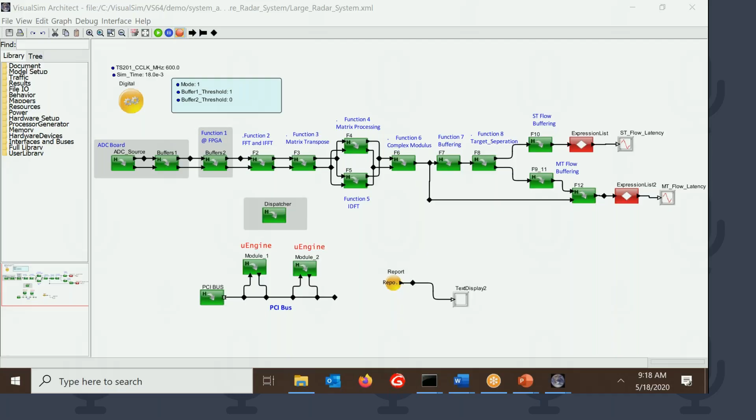Are you sharing the screen? Ooh, I forgot. Let me start again from scratch. Thanks. Okay, so can everybody see my screen? Yes, now I can. Okay. So let me get started.

So today what I'm going to talk about is the concept of a template. The idea of a template is that we provide a model that captures the definitions and the tasks and the operations of a particular application. Today in VisualSim, our focus has primarily been on discrete building blocks like processors, memories, traffic, stochastic processes, plotters, things like that. We want to move away from that to being able to provide a complete solution in the context of an application.

So, for example, I'm going to pick up an application right here which emulates a radar system. It actually does both the pulse Doppler and the scatter radar system. And it goes right from the time that you acquire the signals, the pulses that are coming in. It sends out an electromagnetic wave, gets the pulses back, captures it here, which is on the analog side, goes through a sequence of processing. Some of these are parallel processing, some of them are just sequential, and it ends up with either a static identifier or a movement identifier. So it has two different outputs.

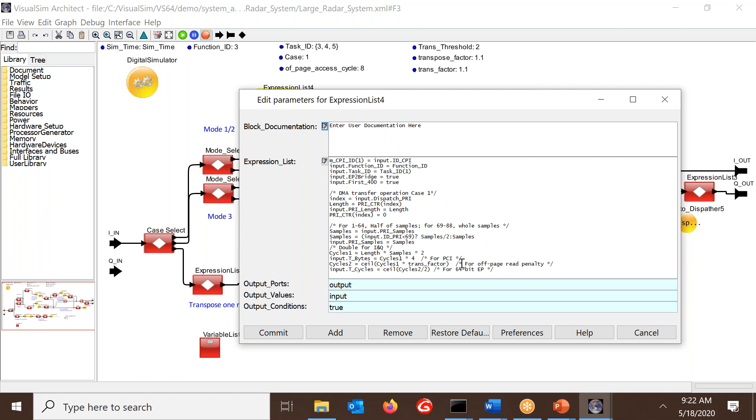And then it's going ahead and doing the calculation to come up with how many cycles it's going to take for the 64-bit processor. This is the main aspect that we need, because this is the one that's sent over to the hardware to say process for this amount of time with this amount of delay. The samples or the length or the bytes, in this particular case it converts all of them into bytes, is used for, for example, the movement of data on the PCI or on the Ethernet or things like that. So this is what a template needs to have.

It needs to capture all, see the data comes in, what are all the different modes, which are parameters over here, or they can be dynamic based on the data coming in. Does the computation of the length or the data sizes and the cycles, and then it sends it off to the dispatcher and gets it back. And of course, you could be doing it multiple times. In this case, it does it twice, which is the first 400 and then the next 400 bytes.

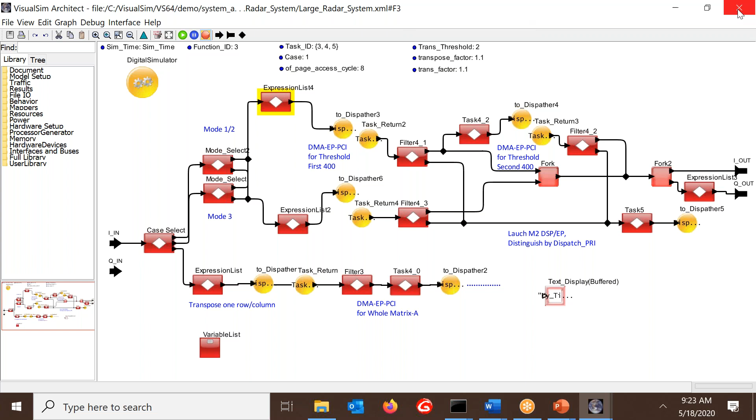Different modes can do something completely different. Here, for example, it gets the first 400 and then it just wraps up. Or here it does the whole thing. It does a column or row at a time. So you can have different types of processing that can happen in each one of these modules that you see here. So this is what a template is all about.

Now, looking at it in more detail, there are a few items that you need to worry about. Now, remember when I told you the signal processing is not included in it. Eventually, we want to include it, but for now, it's not there. What we're capturing right now is the performance related. Now, you're going to ask the question, what about the power consumption? The power consumption is based in the hardware. So depending on what the execution is going to be, the power is going to change, because it's going to turn on the PCI or shut down one of the cores or any combination of things.

Now, if you look at the template, that flow we saw there, the most important thing is the inputs. You can have a large number of inputs, not just one or two, but it can be probably 50, 100 inputs, depending on the particular application. Now, we had one system, the brake system, where we had about 8 templates. We have another display system where we had about 30 templates. I'm sorry, 30 inputs.

Now, the next thing to look at is the sequence of operations, which is what we saw over here. This goes into the FPGAs and cache, then FFT, matrix transpose, the processing, then the complex modulus processing, buffering, and then target separation. As I said, we're not doing the internal signal processing, just have to understand exactly what is the sequence and what is the different variations in each one of those sequences. That's where the parameters come in.

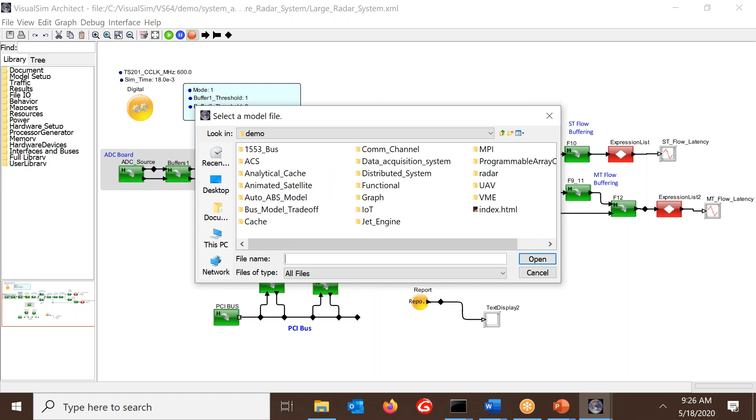Now, the data structure doesn't necessarily have to correlate with what really happens in implementation. So what that means is I can have more information in the data structure than I may have in my real system.

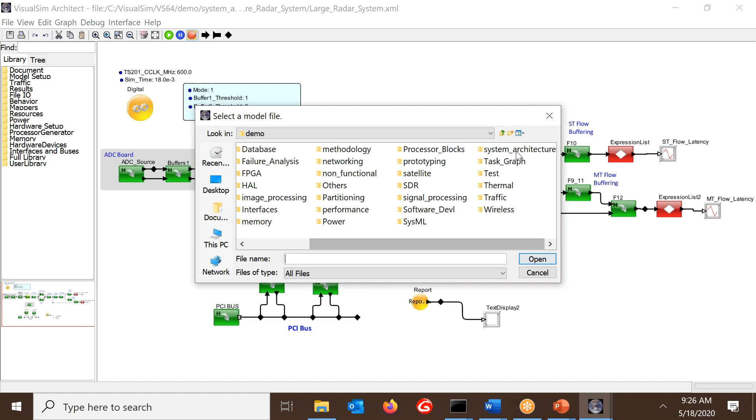Now, we've already talked about this. I'm just going to reiterate: decision at each operation point. So this was the number of nodes, the types of data, the size of samples. Now this is specific for radar. When you start looking at autonomous driving or other components, the behavior may be completely different. So you may have other types of IDs that you want to associate with it. For example, if we take autonomous driving, the data coming in may come from a camera, a radar, a LiDAR, or some other interface. So based on what comes in, the operation might be slightly different.

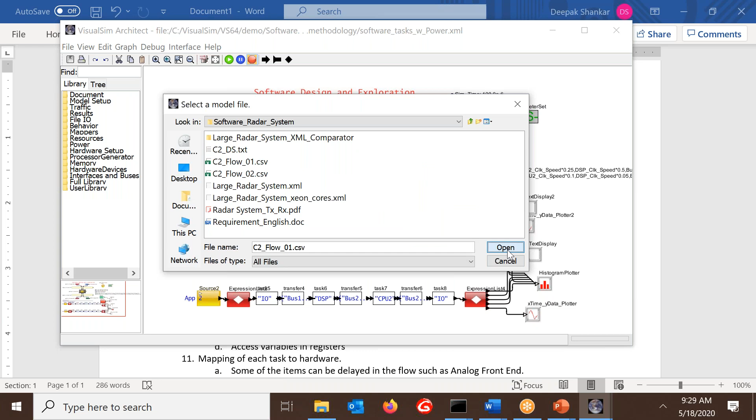For example, some of these say DSP link, so it's really on the transfer, while core means executing on the processor. EP is one of the other processing flows, so it's going to the memories and things like that. And of course, here's where we provide all this information. And finally, how do we implement the whole flow? Now, one of the things that's critical, and we're going to see this in a few of our more detailed models, is that the items can be delayed in the flow.

For example, if I take an analog front end, right now we don't do anything in analog, so we don't need to worry about mapping to hardware. So we just say, here's an analog front end, we're done with it. Okay? Or there could be another item like an FPGA where we're using it only as a cache. We don't need to have it move back and forth. We can just say, okay, here's an FPGA module, it's a cache, the size of the buffer is so much.

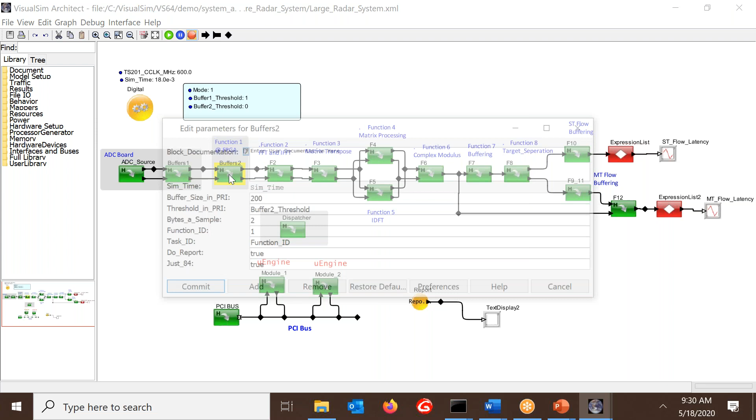So if you look back into our model over here, the buffer here is a parameter, which is a top-level parameter. So we just say, what is the buffer threshold? That's all we need. We're not doing anything else. The entire buffer has been implemented on FPGA and it's listed right over here. And then, of course, the rest we'll have to use some dispatcher to map to the hardware platform. So this is a detailed view on how we create these templates.

Now let's break it down into something simpler and smaller to create a behavior. So we're going to take something that's a little generic, okay? We've got a simple hardware system. It's got two cores, it's got an I/O, a DSP, and it's got two buses and a bridge between them. So we assume that this is your application.

So you have some sensor data or some trigger or an interrupt that triggers this, and it goes through the sequence. Now, there's a rate here that determines how often these triggers are coming in. And of course, associated with each one of these tasks, there's some sort of a cycle count, or how much is the delay associated with each one of them.

The third aspect is the mapping. So we get to map this. Each one of these tasks could be mapped to one or the other. So here you notice task 1 goes to I/O, task 2 to CPU, task 3 to DSP, and task 4 to the I/O again.

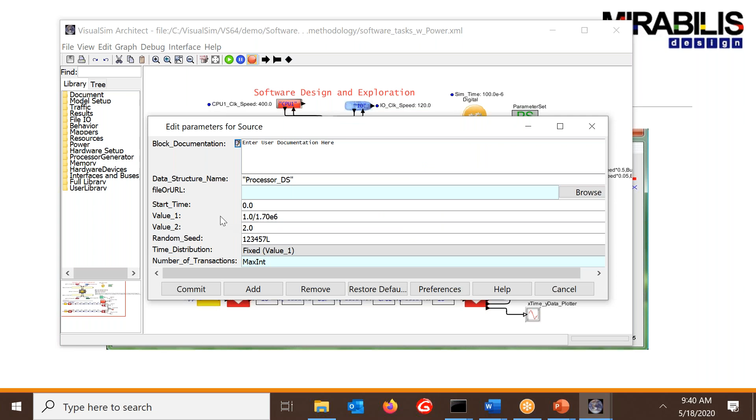So once you've described all of these, then what you want to do is map them. So what I'm going to do now is look at each one of these blocks so you understand how they're created. The first is the traffic. Here the main thing is the sensor rate. Here we're describing details about the signal that came in. So you've got a set of parameters or fields that we're adding to this particular sensor data.

Now let's go look into one of these. Now here's the thing that's important. If you go into one of these, what are we seeing? We're seeing 3 blocks. So what are these 3 blocks doing?

The first one is specifying a timestamp as to when it was created. The second one, if you remember, we talked about the delay. So here the delays are actually being defined separately outside of the flow. So we're just saying that we're going to map it somewhere, but we're not specifying the delay here. The reason for doing that is because if I'm going to be doing it on CPU 1 versus CPU 2, my delay is going to be completely different. So at that point, I want to change it, not do it inside and hard code it in the block. So that's why these parameters have to be referenced up so we can go and get it from somewhere else.

Now, we can be doing a variety of other things. For example, here we're doing some tracking. We may not need some of these, but just so that we can get statistics to capture exactly what is happening. Now, if you notice, this was just the I/O, which means you're just going and processing it here and coming back.

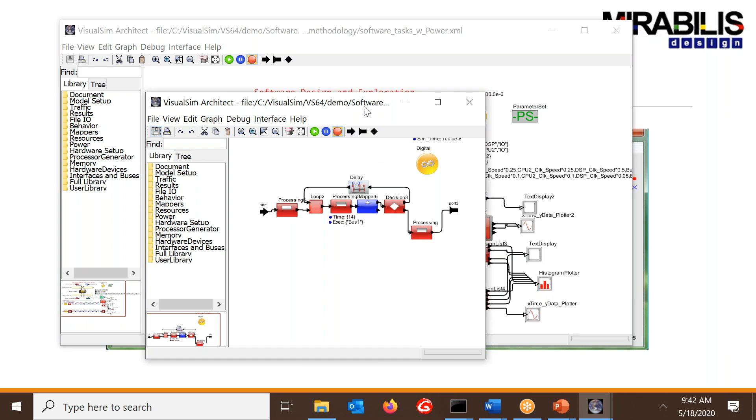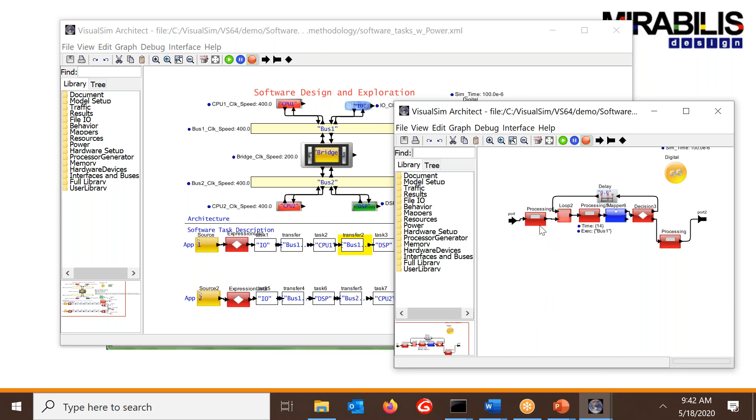This one here is a little more complicated. Remember, we go from I/O to CPU was just I/O bus 1 CPU, but then CPU 1 to DSP was bus 1 bridge bus 2. So that becomes a parameter of the block. In this case, you just see it's bus 1, but here you'll see it's bus 1 bridge bus 2. So again, you have to set it up in the template so user can enter those easily. So it comes in here, same thing with setting up the timestamps.

Then what we do is we go through the loop, we get the first one, we find out what is the first element, and then we use that one. So here, if I look at this, I'm getting the 0 from this particular field, which is that bus 1 bridge bus 2. I'm getting the first element, and then I'm removing that from the list, and that becomes my element over here to say this is where I want to map it to. So I want to map it to the bridge, or I want to map it to something else.

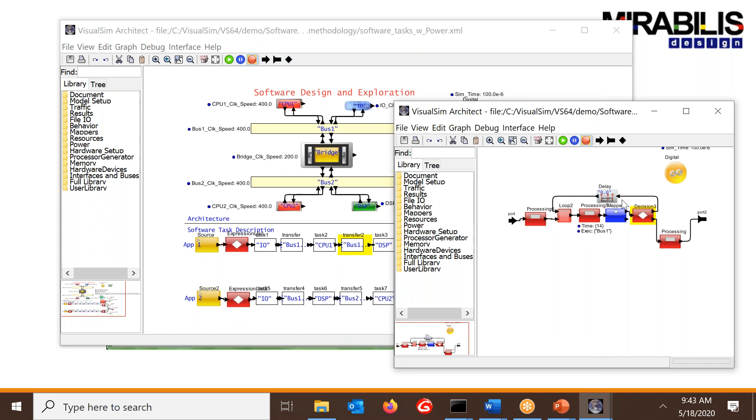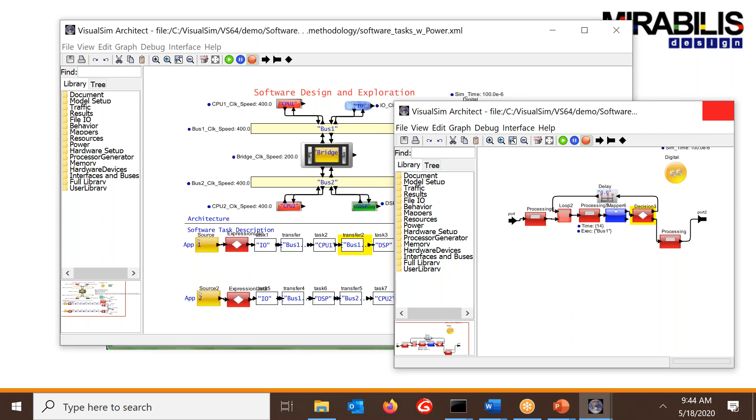Okay, and so it does that, and then here it checks to see if there are more elements. If there are more elements, then it continues through the loop. If there are no more elements, it just drops it and sends it off here. So this is where we check to see if the length is greater than 0 or the length is 0. With 0, it says, hey, I'm done, go to the next step. If not, I'm going through a loop. So if you notice in the earlier one, the radar, we didn't have a loop. We just went 400 bytes came out. Here, we're going through multiple things and we're going through loops. So depending on your thing, you might do one or the other.

And then when they're done, similar to what we saw in that radar system, we generate statistics. So again, we have to research to find out what are the statistics that are relevant. In this case, the relevant one was the latency and a histogram associated with the latency. Those were two that we were interested in. So this is on the template or the behavior side.

Architecture side, in this case, what we have is quite simple. This is a starting model. So we just have a system resource to emulate each one of these blocks. This is a system resource for each one of them. They're all identical. Now, associated with each one, we have a name and a speed. That's the only two we're interested in right now. Some of these other models may get a lot more complicated, but we'll start with just this.

Now, here you notice the application 1, application 2. It says these are the 4 sequence of tasks. Remember, we have those tasks as bubbles. These are the 4 for application 1. These are the 4 for application 2. And this was the delay in each one of them. So we're mapping each one here. So for example, over here, taking app 1 execution, and then that's the app 1 time. So we're taking each one of these and putting it in one of these items here.

Now, in this case, what we're also doing, which I think is very critical and we should make it a standard practice, is add in the power table. So in the power table, we provide information on all the modules, CPU 1, 2, DSP, bus 1, bus 2. The bridge is kind of missing here, that's a good point. We need to have that.

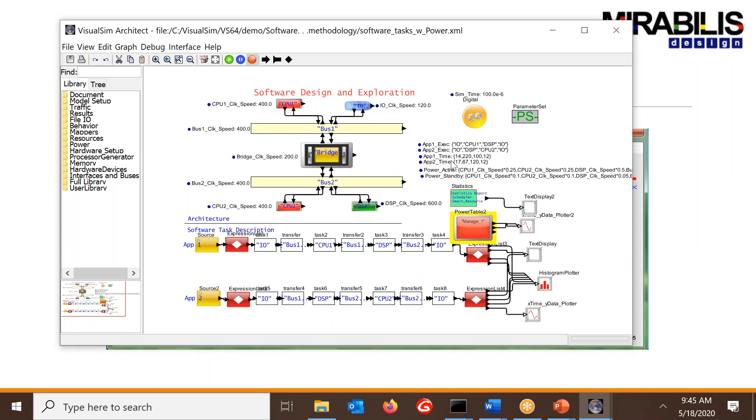And then we have the power. Notice here, the power is linked to the speed of the respective devices. So if I get the speed to, say, 75 megahertz, the power will be one value, while if it becomes 200 megahertz, the power will be a different value. Here, for example, we're assuming it to be linear; it may be exponential, but for now, we'll assume them to be linear. If it's exponential, we'll try out some other formula for that.

Okay? But the main idea here is to capture the behavior, including the sources, and these could be multiple. You might have to wait on multiple data to arrive. Sources, what are the tasks, the transfers between the tasks. So you have these here. Then how the mapping happens to each one. So you build this up, and then you build your power tables. So this is, in a sense, how you describe a particular system or your application.

So if I can do this for, say, autonomous driving, or for a networking application or an IoT, the user immediately knows, hey, I associate with this, boom, it'll be very easy for me to go ahead and create this application or extend this application to very quickly define what they're building. So that way the time taken for a user to ramp up reduces substantially.

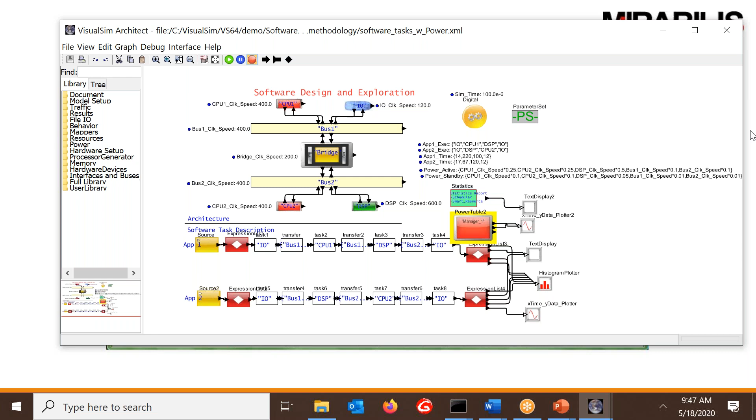Okay, at this point I'm going to take a quick break. I'm going to let anybody ask any questions before I go on to the next model. Any questions on any of these? So I have one question. How do you debug that model?

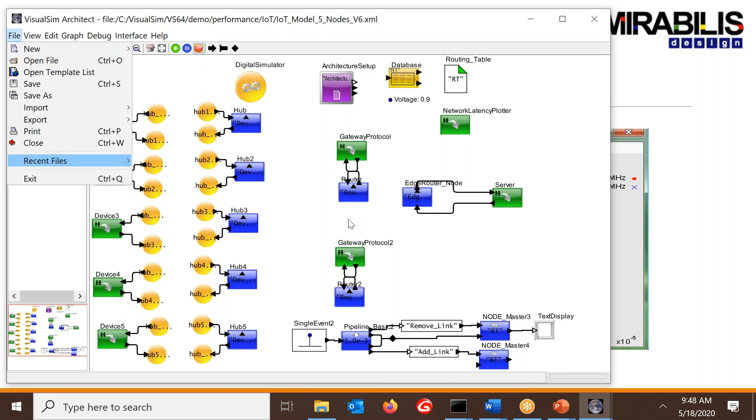Very good question. So one of the things that we want to consider is the debugging of these models as well. That's a very good question. We should consider debugging as an important and standard functionality of what it is that we're doing. So how do we debug the model? There are three things we want to use to debug the model. First and foremost is, are we getting any outputs here? If we're getting any outputs, that's a good thing.

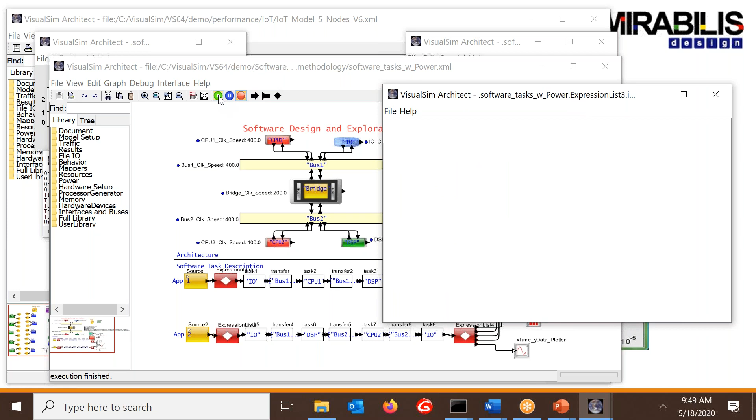The second thing is we have these two parameters, and I'm going to go ahead and run the model so I can show you on the output. Oops, we did not capture that. So let me capture, I'm going to do a listen to port here, and capture the data structure that terminates. Okay. So when we have these data structures, one thing you'll notice is that we have this thing called a trace array and a time array. And that's telling you what sequence it's going through.

So in this case, it's T1, which is the first task, so first application. So you can see we went through IO, which is correct. Then we went bus, then CPU, then bus, bridge, bus. Then we did the DSP. Then we did the bus, bridge, bus again. And then we came to IO. So this tells me two things. One is the sequence was all correct. And the second thing is that the sequence completed. Those are two things that are critical.

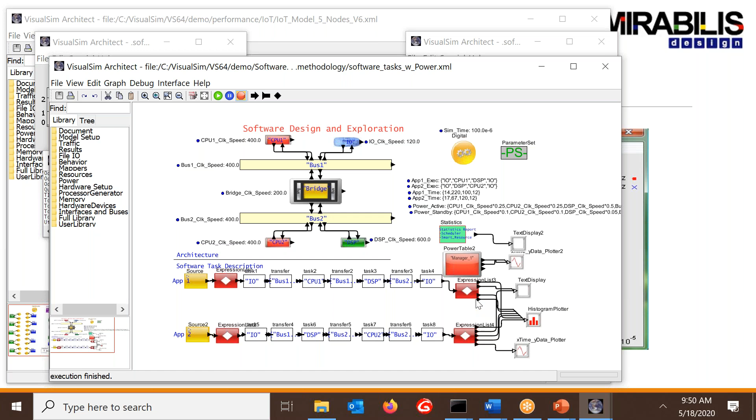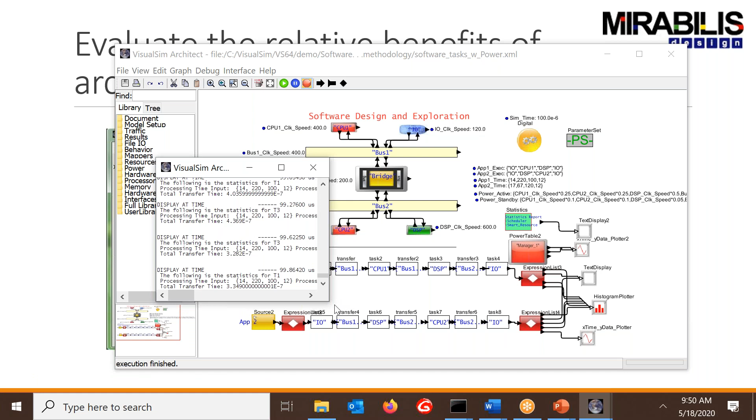The next thing we want to look at is where the delay was the most. So we want to find out if there is any bottleneck. And that's where we start adding other pieces of information into the system here. So we can start generating other types, and this is where we have to come up with the interesting things that we want to do. So for example, here we say these were the processing cycles, and this was processing plus queuing delays. And these were the associated transfer times, and this was the total time.

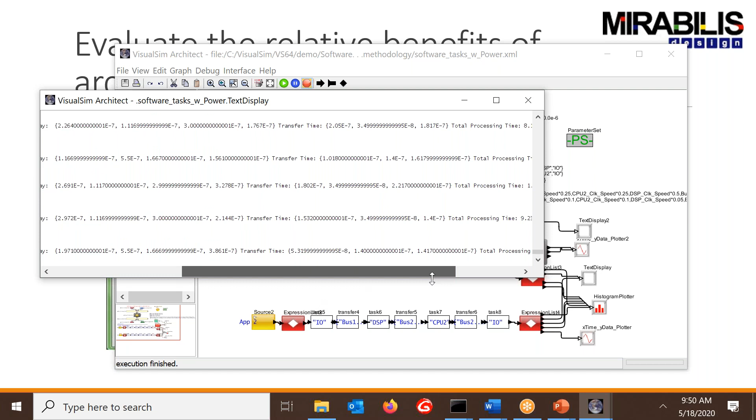So what are we seeing here? We know now that if these two don't match, that is, this multiplied by the clock speed, if they don't match this and they're above certain thresholds or limits, then we know that there's too much of a bottleneck somewhere in the system. The second thing we want to look at is to compare the transfer time versus the execution time. If this is too high, that's also an issue that we need to consider. So these become the standard way of debugging your system.

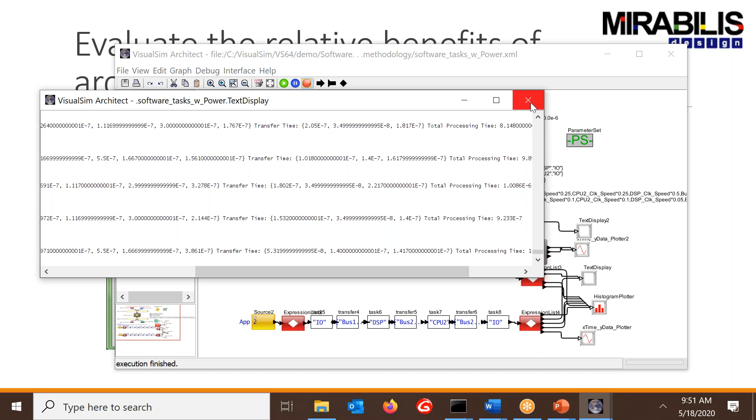Now, the first one I showed you, the arrays, those are already standard generated by these blocks. The user doesn't have to do anything. But these other things, like the comparison between the CPU time versus the transfer time, for those we have to use our new diagnostic block that we're building up, and some of these functionalities are already available in that. So you can look at the output and see if the results are correct. Those are a couple of ways that you can incorporate it. Daryl, do you want to add anything else to it?

I would say that sometimes you can send messages that certain tasks, subtasks have completed. That's a very good point. So if you want to do it in between, you can send messages out from the blocks. So you can say that at this point it completed, and you can send a message to another block.

Why is that important? Moini's diagnostic block actually has some of that, where I might have multiple flows, and they may actually at some point even interject, which means I might need data from flow 1 and I may need data from flow 2. So I want to figure out if the previous tasks were completing, or is it just that this one task requires a flow from 2 others coming in, suddenly stops operating, right? So if these messages are sent out, I know, okay, task 1 completed, task 2 did not complete. So the bottleneck is in task 2. I need to look at task 2 more.

Yeah, there's one other factor, and that is when you go to these resources, they may have an implicit width of bytes or bits or however you measure it. So the problem with the template is that it's like a cookie cutter. And a lot of designs don't fit into a cookie cutter. And so I think having the width to the resource as a parameter or an ability to change that.

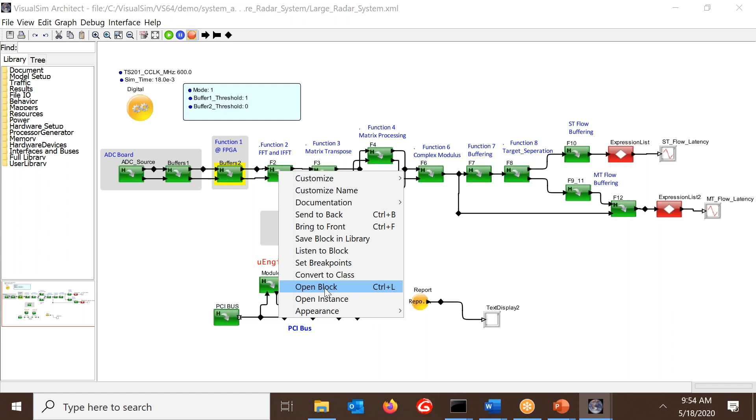Now, obviously, I can change the speed, but if the customer sees that you double the speed and really it's just because you're trying to model it with double the width, it's probably better to put double the width to that processor. That's a very, very good point. If you remember going back to this radar system, you notice that here we were not just computing the, sorry, wrong block.

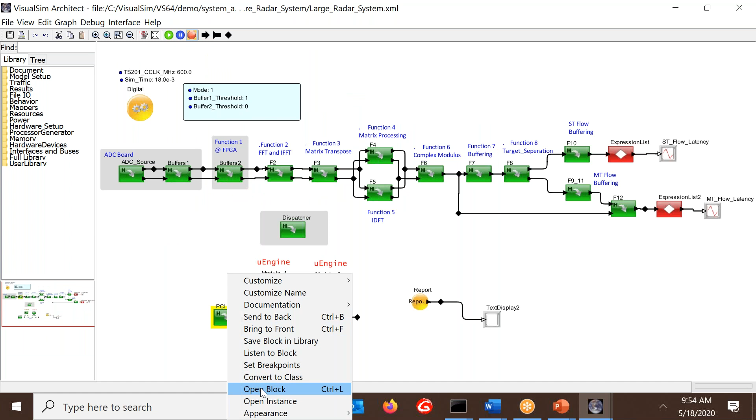If you go back here, we were computing both the T bytes and the T cycles. This is a very important consideration, because the reason we were doing it is, if I was going into the PCI bus there, and I have, say, let me go up to the top level first. Notice here, I've got the width and I've got the bus width in bytes here.

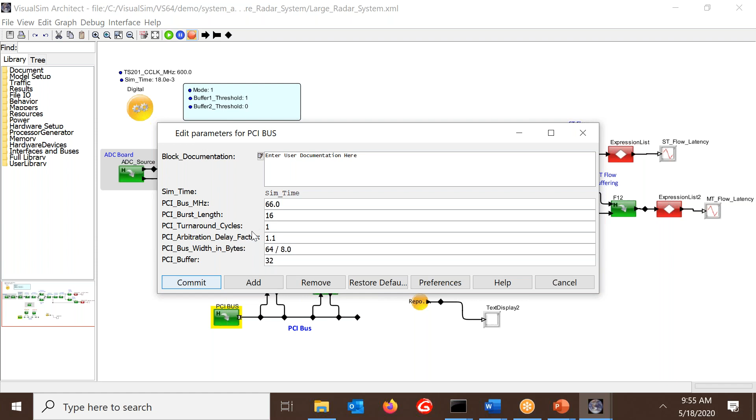So in this case, the delay is based not just on the size of the data, but also on the length of the data coming in divided by the width, and you may add additional items like a turnaround cycle. Again, that's on the hardware side, would not be on the template side. The template would just send in information about the data size and the cycle count. But that's a very good point to consider as well when you're building up your templates. Any others?

You might mention that we have the array plotter. So when you get into these complex systems, you have a lot of things going on. And the array plotter has the ability to plot; you just fill up an array with some values and you can see kind of what the system is doing. So the biggest problem with these larger systems, and that's the trend, is that you can't see what's going on. You may have all of these parameters, all of the values, but you can only see some output coming out of it.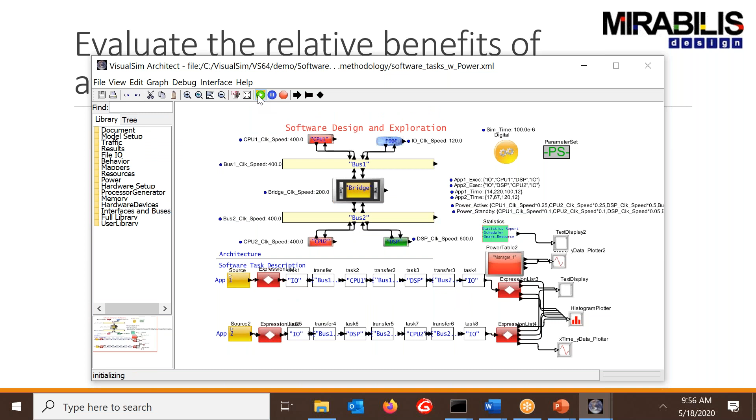But it would be really nice to see, sort of like a utilization of each, let's say, processor or resource, and you could see it in one plot. Now you do have a histogram there of the processing. That's kind of going in that direction.

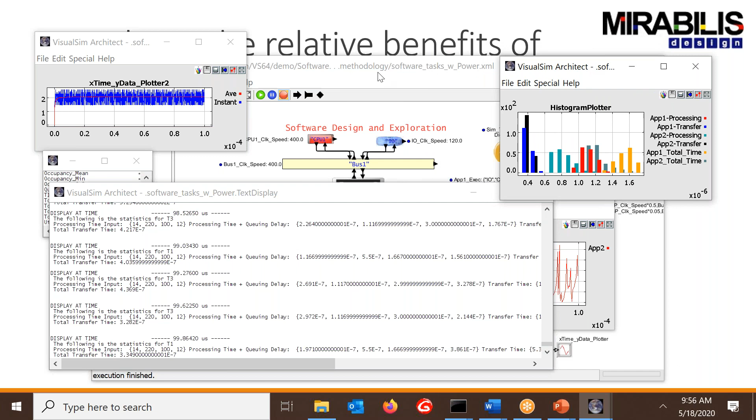Good point, Moini. This applies to what you're doing, for example over here, when you generate this sequence. What Daryl's talking about is an easier way to view these. See, you have your throughput, you have your time, and you have your trace. Is there an easier way to view this data? I mean, the array plotting is one way. Are there other ways to look at it? That is something you should consider as part of the diagnostic plot as well, Moini.

Hello? Yeah, we had the trace plotter, right? We built it for the Denso. Yes, so that could be another one that we could also utilize. Absolutely. I think that could be another one that we should try to productize also. I think it's a good point.

Daryl, if I continue on to the next one. Yeah, go ahead.

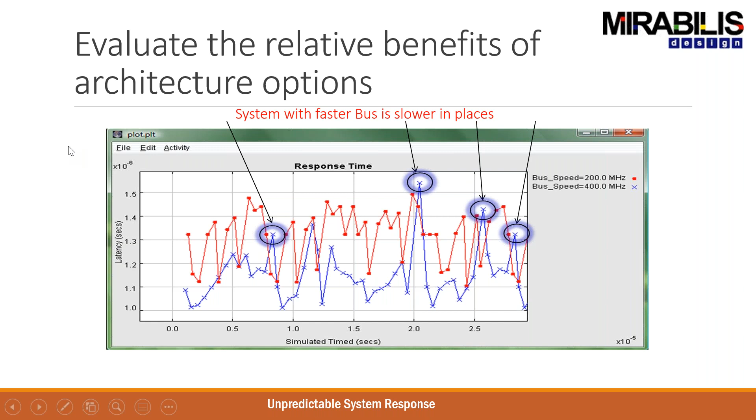So this one was a very generic template, but it did show you very well how you can take multiple application templates, create templates, create interrupts, and then map them to hardware platforms. So this is the basic of any system you're going to be building, and it also helps you understand how you can create very complex architectures and do complex research and analysis. Okay? Now, we're moving on to the next one, which is an application. So this is a real application.

What we have is a large number of these IoT devices. And don't get locked out by IoT thinking it's a watch or a phone. It can be a whole variety of things. It can be sensors in an industrial plant where we're trying to figure out if the bearings are wearing out, that they reach 20%, or they can be elements in your car that are providing vitals about the car, like the amount of fuel, the water temperature, other aspects to a central data center. Most of them have a very similar approach, and that's where the IoT template works. I'm going to walk you through that.

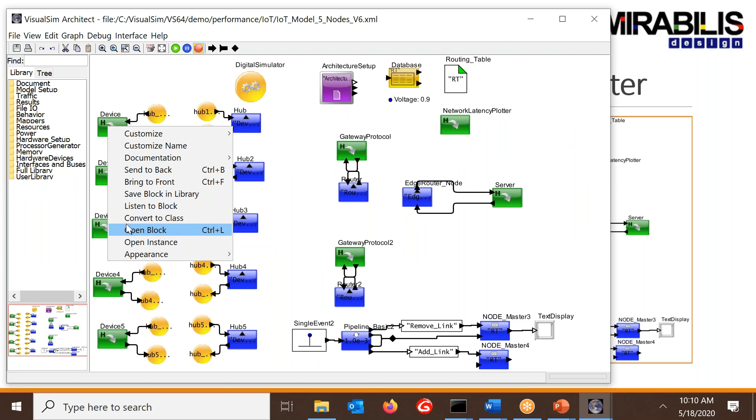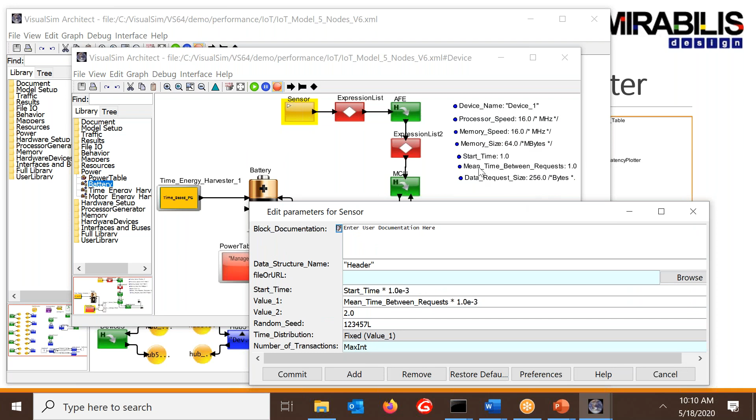So now here's the thing. This one is my energy harvester. This is taken out of the power library. Right here, this is a battery, again taken out of the power library, the power table taken out of the thing. So all of these are from the power library. And now here, the sensor is of course a traffic generator, and we have certain attributes which are parameters at top level here. Now realize that I could have multiple of these.

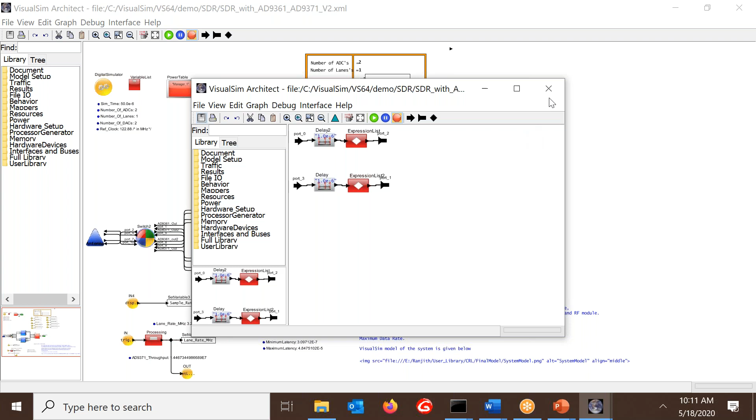Now in this particular case, this thing here, as I mentioned, is just based on the size of the data, it's just randomly generating a latency. Now, this is where the first change has to happen, because if I take a real system, you could have multiple of these, and then here there could be a lot more complex processing.

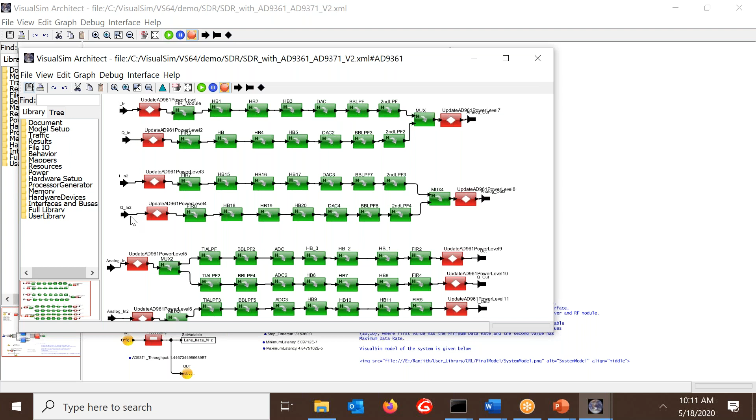I'm not going to go into details here, but this is what could be happening in this particular device called the AD9361. It's a transceiver from Analog Devices. As you can see, for the different I and Qs with 2 different channels and your analog interfaces, for each one of them, install those here.

Each one of them, there's a sequence of operations that occurs. Now, each one of these, if I go into it, just has a way to compute the clock rate. You see what it is? You can see what your delay is. So it computes the clock rate, computes the delay. And that's how it delays it and sends it out.

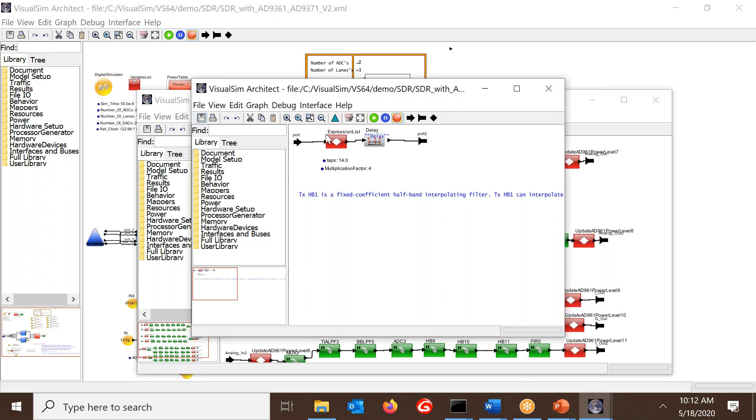And you can see here the first digital filter, the transmitter signal path is the programmable polyphase FIR filter. Go to the next one. The fixed coefficient half-band interpolating. Now notice, this is what is being done, but we're not actually implementing that signal processing algorithm. We're just taking the delay value associated by calculating here the sample rate. That's a multiplication factor. Again, this is from the data sheet.

We calculate the number of taps at the end of the data sheet or from the user's input for this particular block. And then we calculate what the delay is. And that's how we're doing it for each one of these building blocks over here, and then a mux to bring the I and Q together and send them out.

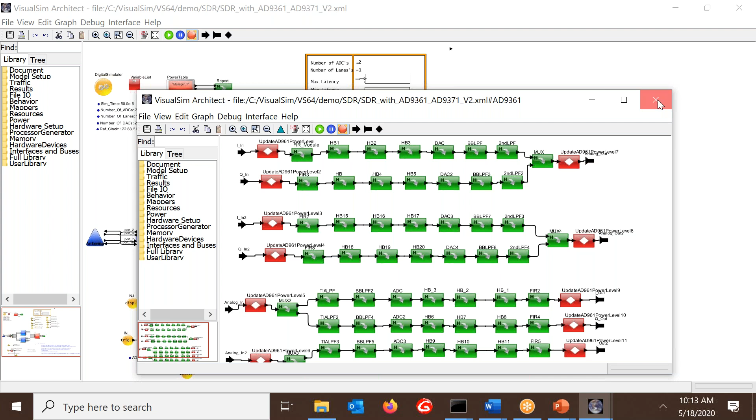Now, obviously, for the analog, the flow is slightly different. When I look at this, see, this is a single pole low pass filter. And that's the sequence of things you have over there. So this is for the analog interfaces, they're slightly different. So what you saw earlier on the sensor, which is a simple delay, we have to take that and add this logic over there. So we need to add something that's a lot more complicated.

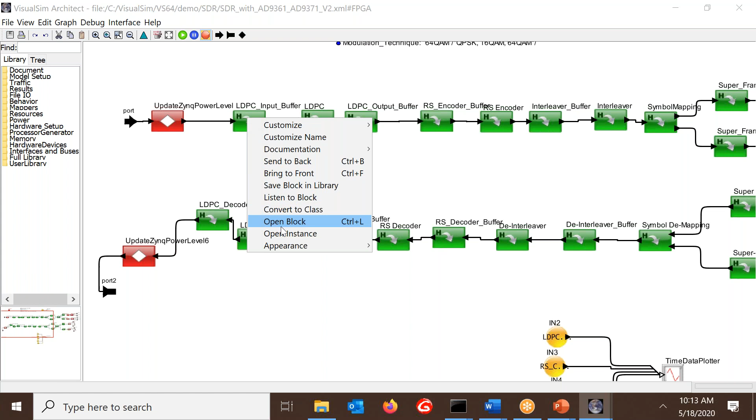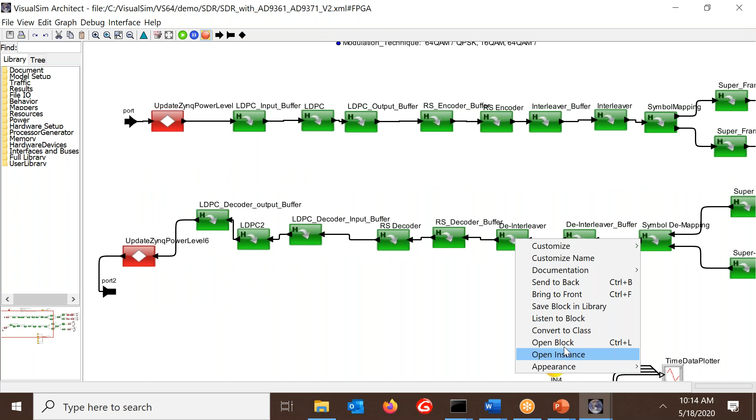Now, once it's completed that, then we have to add the signal processing element to these flows here, which is, you can see here, we're doing the LDPCs, the encoding, interleaving. So we got to find out what are the things that happen on these elements as well. So we have to calculate that aspect also. So you can see what is the sequence of functions that are happening, and then you're doing your computation right over here. So again, now it's no longer just a delay function, but we're actually going through a sequence of all these activities. So if I go look at the interleaver, I get the depth, and I get the out bytes, and I do my computation.

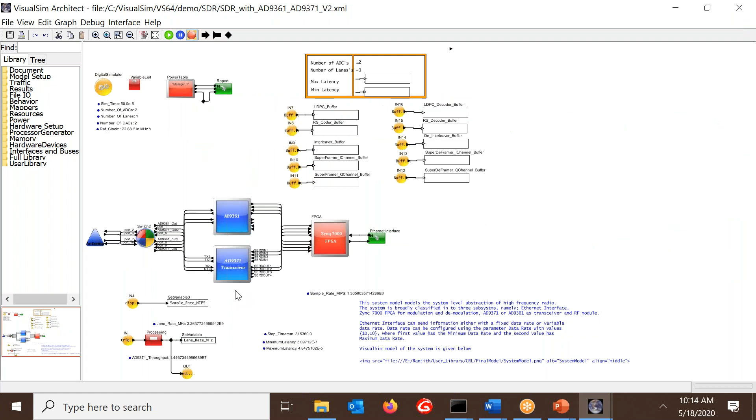So what you're seeing now is an actual system where we're adding more and more of these functional details in the system to make it very, very detailed. So again, the user could put in just a delay, or he would replace it with that analog front end, and have a more detailed model of the system.

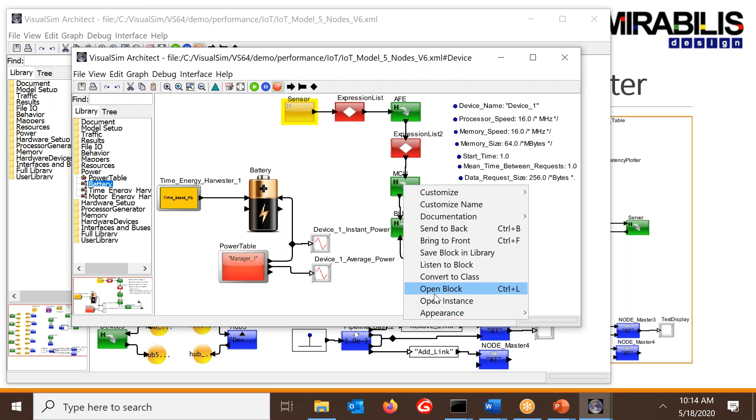And of course, in this case, the hardware here, and most hardware is going to look very similar to this. So you have a processor, you have a DMA, you have some sort of a device interface that is from an analog or from a sensor coming in, and then you have some memory. Maybe you might have 2 or 3 other memories also. But that's in essence what most of the hardware is going to look like. And we can look at a few of them and just create a standard template that we could incorporate for that functionality also.

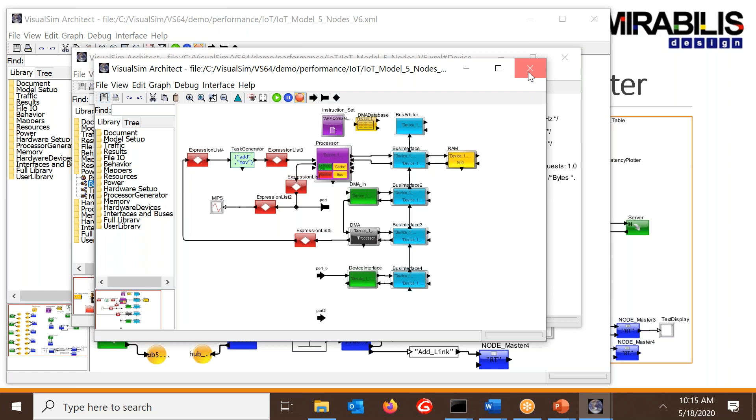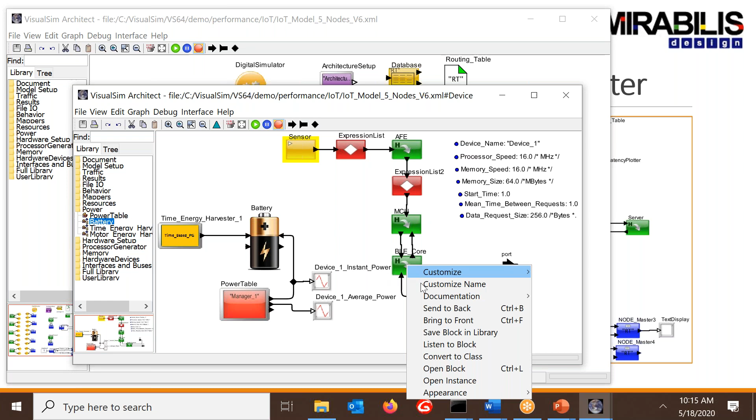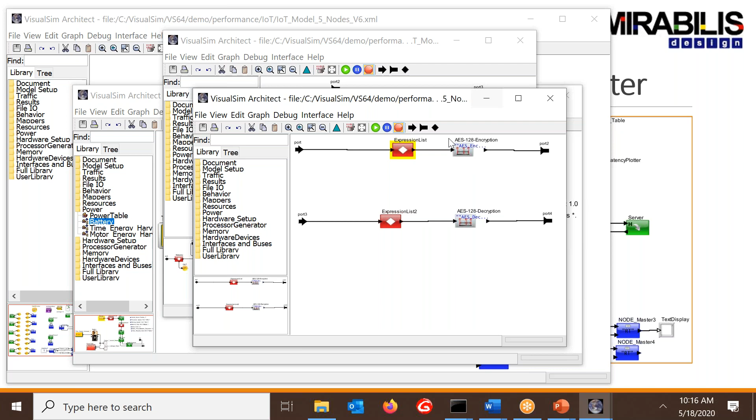Okay. So we define the power, we define the interface, the analog front end, we added the MCU, and now we look at the Bluetooth. So the Bluetooth, in this case we have the encryption. Again, the encryption here is a delay, depending on it's 16 bytes, and then it's 1 megahertz. So that's the encryption delay. But you could potentially add more logic to that as well, based on other attributes, or you could potentially even add the encryption algorithm right here. It's a delay for the encryption.

Now, the link layer here. So this one over here, when it comes into the wake up, it sends it out to wake up the Bluetooth module over here. So Bluetooth now is the finite state machine. So this is part of the standard that you would see on a low energy Bluetooth. So you can see the different states. Notice here there's not a whole lot of states here. 1, 2, 3, 4, 5, 6, 7, 8, 9, 10 states. That's what you really have here. Now 9 states. But you could have lesser or more number of states depending on your particular application.

But now the state machine is actually quite interesting. The reason is you can control the state machine based on your input trigger. Because notice these guard masks, they're based on what's coming in, and you can also control it based on just the standard delay function. So that is another possibility as well.

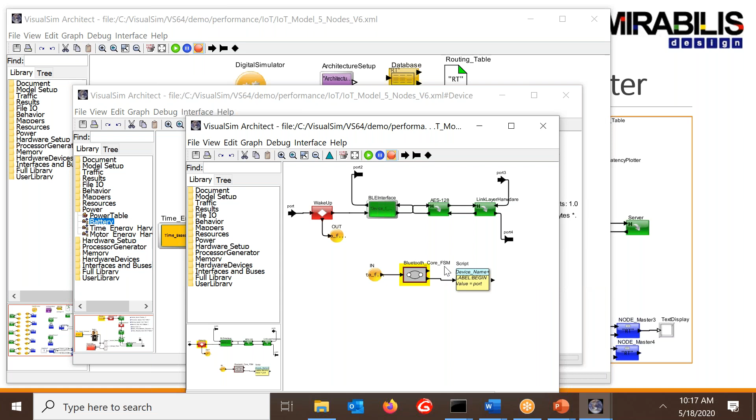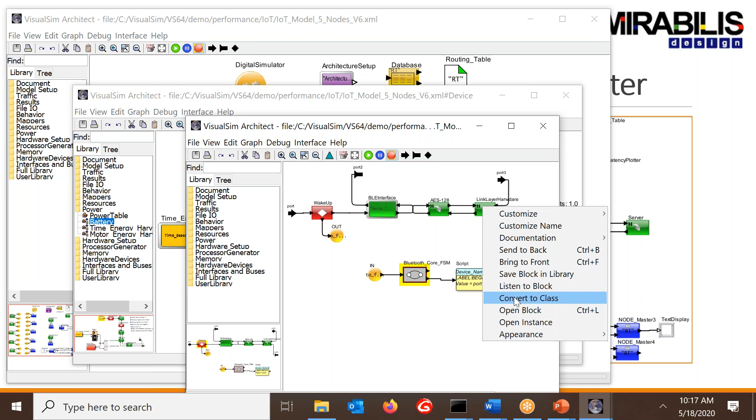And of course, the state machine allows you to describe in detail the communication with your network hub. So notice now, we have added all the items to the flow. We've got every single element in the flow that we have for an IoT device, including all the encryption, your Bluetooth interface or any other interface. You can also look at the link layer hardware, which is the L2 layer. So you've got the wireless, and then you've got the Bluetooth right here, communications.

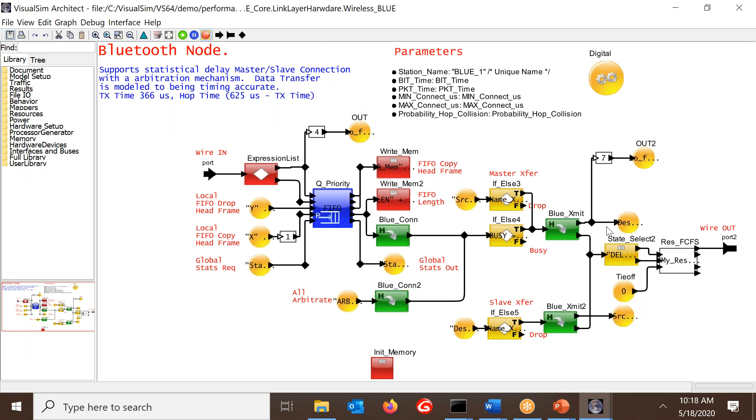So notice here we don't add much to the baseband. Again, that's some logic that we can add. This one here is more detailed because this is the Bluetooth interface itself. So this is doing all the logic related to the Bluetooth as well. Okay.

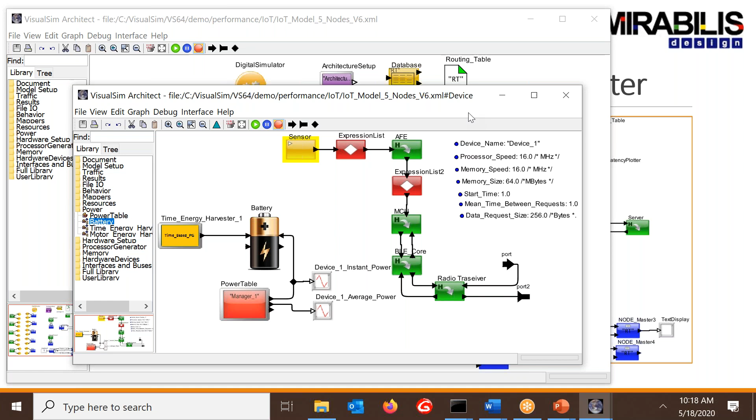Now that you've seen this complete flow over here, remember this is what we want to start building up for other systems. Now we want to look at how many sensors are typically there in these applications. What are the clock speeds of the sensors? What is the data size of these sensors? What are the different attributes that these sensors have, and start enhancing these modules for adding that functionality as well. So we come up with a few of these different IoT modules, we add this functionality, and then we would have a template that's available for any IoT application.

In this case, the network is fairly simple, and we like to keep it like this for most IoT systems. It just sends it out to a network node block, and the network node block goes across using a routing table, which is right over here. The routing table sends it off onto the network, and in this case, the data center is simple, but again, you might need to add a more complicated one. In this case, it just comes in with a delay and sends it back.

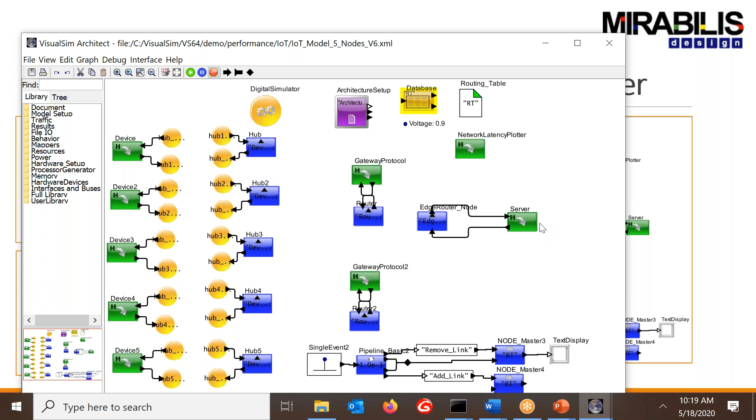But we might want to add a more interesting data center model as well, where it comes in on any one of these 20 different communication channels. It would, depending on the data, or just randomly, send it to one of the processing units, and each one of those, depending on the data size, may go virtually to some set of storage devices. Typically, that's how a data center would operate. So building a data center model would also be something that we could do with this particular design.

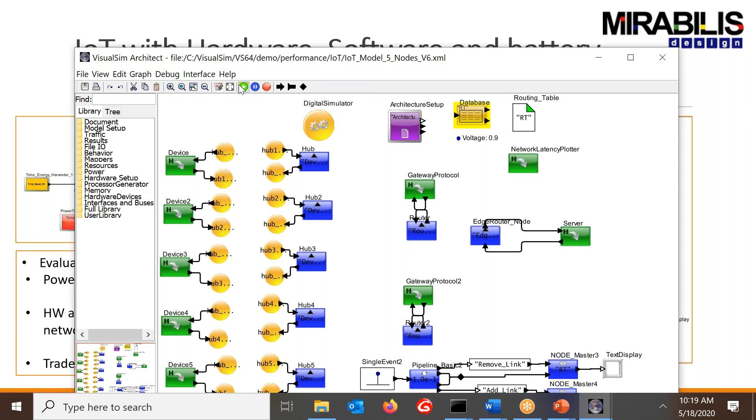So, what are the typical types of analysis that people do with these kinds of systems? Obviously, within IoT, as I mentioned, the power would be critical. The second thing is, from the time that the sensor starts generating data, what is the response time? I would say these two are the main ones. The third one, the side benefit, is how much efficiency am I getting on the processing? The reason that's important is most IoTs are cost sensitive. So rather than going with an expensive $3 or $4 MCU, I'm going to go with a $1 one if I don't need so much processing. So that's a very important aspect.

The other aspect is looking at the analog front end, looking at the Bluetooth, all of those things. Other ways I can reduce cost. Maybe I don't need a very powerful Bluetooth, or I can get away with a lower frequency AFE or ADC converters, so I can save costs there. So there are those kinds of things to look at for the efficiency of the system.

The other aspect regarding the power is optimizing the attributes of, say, my modem, in this case the Bluetooth, which shows me that most of the time it's transmission and there's very little receiving. So in this case, I don't need to keep advertising a lot. I could reduce the amount of advertising time and only advertise as and when it is required. So there are those kinds of things to consider. Depending on what it is that you want to do, you may want to look at different aspects.

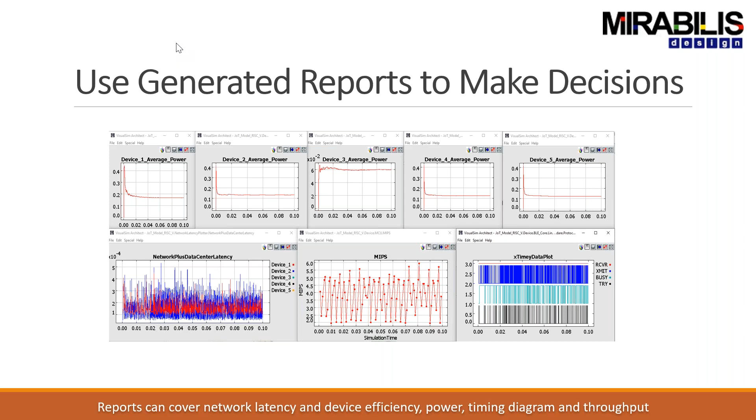Okay. So there's another one that I want to show you. This is a little different from some of the designs that you might have seen, in the sense that this one does not show very well as a nice flow diagram or block diagram. But it is actually very, very powerful for someone that's coming from an analytical model. An analytical model is an Excel file.

So what do I do in an Excel file? I say each one of these is generating data. It's 10 milliseconds in each one of these nodes, and then it's 5 milliseconds for transfer. I add them all up, and I get a delay. This one takes that and makes it a little more dynamic, which means that if there are things operating in parallel, one of them can work, the other one cannot. So one of them will wait while the other one is processing. So there are the queuing delays.

The other aspect is, for example, on the power, if nothing's happening for a period of time, I can shut it off to a much lower state. Those things cannot be captured in an Excel spreadsheet. So that is where we use this kind of a model. Now, obviously, this is something that we need to make generic. Right now, it's very specific to a CAN bus based automotive system. But we want to make this very generic, so that it can be applied to any application that's got distributed processing.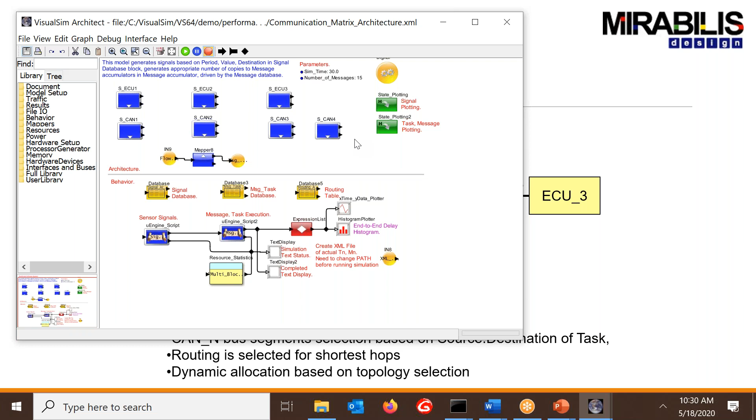Okay, here we go. If you notice, this model is not very interesting, meaning that we're not actually putting in a lot of the look and feel. But associated with every one of these, we've got 3 ECUs, ECU 1, 2, and 3. We've got the CANs, CAN 1, 2, 3, and 4. We're actually ignoring the bridges in this particular case, which is fine, but we would have to add that also. And of course, we have a dispatcher in the middle, which is the mapper that sends it to one of these.

Now, what do we have? We have a signal database. Each one of these signals has a name, has a value. The period says how often we're sending it out. The worst case execution time tells me what is the delay for me to get whatever processing I need done on that signal and complete it. Does it complete within this time?

Now, notice here, these signals are put into M1 and M2. They're all put into M1 and M2 for some reason. And these are for later plotting, we can ignore that, so we just focus on these. Each one of these signals gets put into M1 and M2. So those are the destinations. Okay. Now, the messages: we've got M1 to M4, and then we've got T1 to T4.

Now, notice here, we're reading from a buffer, and then we're writing out to a different buffer. And notice that we're sending it across the network. Again, this has to be generic. The model should be able to figure it out based on what my source and destination is. The user doesn't have to put this. Of course, where I'm executing, the user does have to put it.

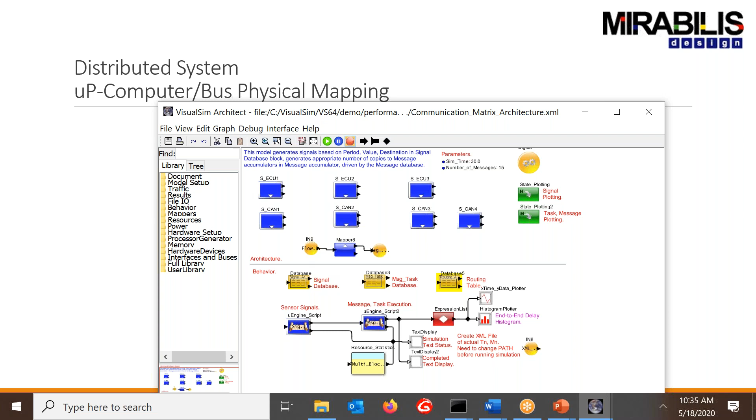The key thing with task graph models today is that all task graphs are done analytically, which means we compute how much delay it takes, and that's it. The problem with task graphs is system bottlenecks or deadlocks. What it means is, I have a dependency for M1 to complete before T2 can start, but M1 is not able to complete because T1 cannot start, because the resource that it needs to process on is not available. So it creates an extended deadlock. This is what we want to be able to discover when we're doing task graphs. Where are my deadlocks?

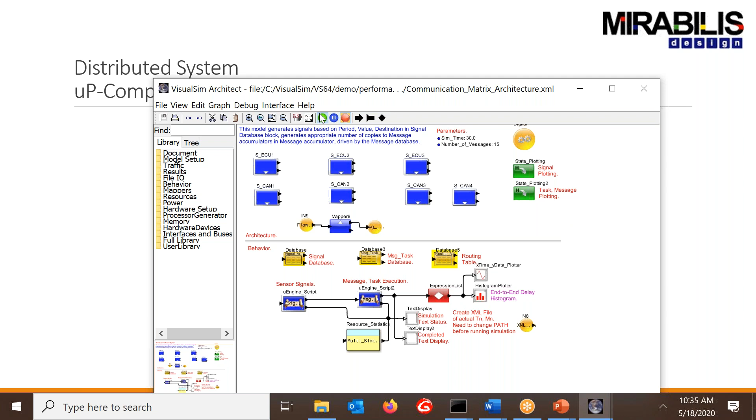So there are other kinds of plots that I'm missing here. For example, what I would want to know is, when the sensor data is generated and put into the T1 buffer, how much time does it take before the data is taken out of the T1 buffer to start executing the task? That will be your first question. So that's from ready-to-run to run. The other thing is you might have these things generated, but then it might wait on something else. So for example, Sensor 1 data goes to T3, but T3 cannot start until T2 completes.

So which means I have ready, but then only after the T2 completes, I move from ready to run. And from that point onwards, I'm waiting for a resource to become available, which is root of the problem of the T1 having a deadlock. And it takes some more time. So that becomes a queuing time. So it's a waiting time, a queuing time, and then the actual execution time.